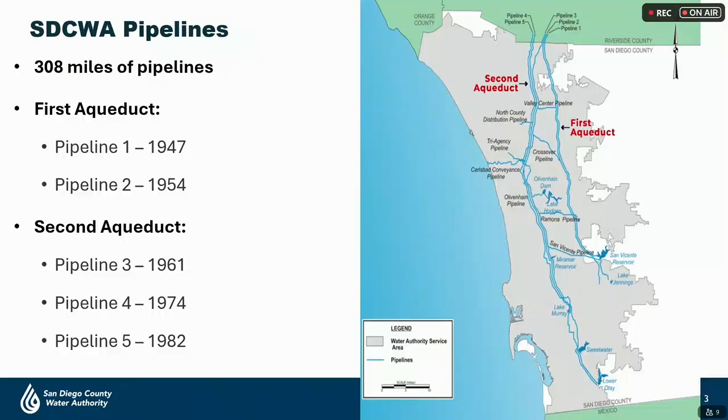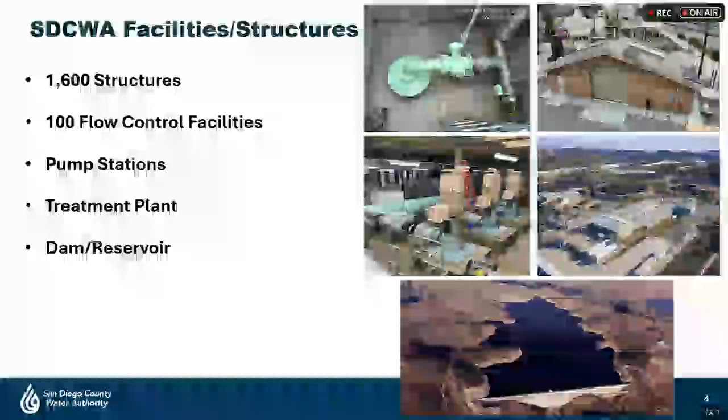In addition to our pipelines, we have several facilities and structures. We have about 1,600 structures that allow us to drain and refill our pipelines as needed. We have 100 flow control facility connections conveying water to our member agencies. And then we have several pump stations, a treatment plant, and a dam and reservoir.

Before we get into the details of the workshop, I want to take a moment to walk through the fundamental differences between a regional system the Water Authority has and a local system on the retail side delivering water to the end user. Due to its large scale and high pressures, the Water Authority's system is susceptible to higher risks if it fails. The more risk we put on our system, the higher likelihood of failure. That is why we are very cautious when asked to move to a higher risk CIP.

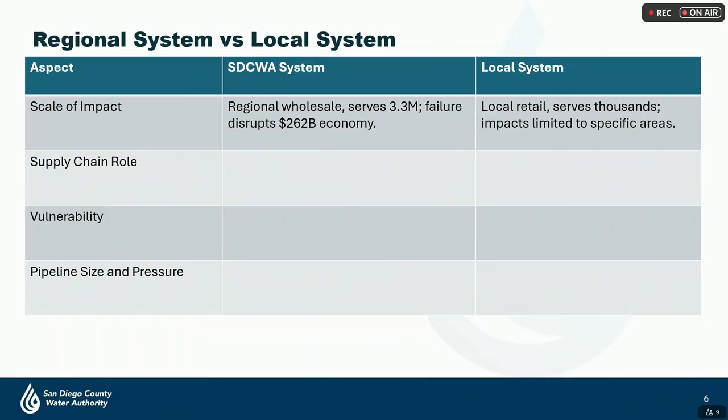Both the regional and local systems are equally important. Disruptions to either of these systems has a different level of impact. For the Water Authority's regional system, a failure potentially disrupts the entire region, affecting millions of customers. On the local side, a failure will also have impact, but be limited to potentially a specific area, impacting thousands of customers. As an upstream provider, the regional system can have a cascading effect if it fails. Each of these systems has different levels of vulnerabilities, and the impact can vary greatly. Regional threats of drought, seismic, and cyber attacks can result in a widespread impact, and because the system lacks redundancy, take a very long time to repair.

There are also local threats that you may face, such as pipe breaks or contamination, and typically on a local system, there are opportunities for redundancy, and repairs can be completed in a faster time frame. Finally, there can be bigger consequences of failure in the Water Authority's large diameter, high volume, and high pressure system as compared to a localized failure at reduced volumes and pressure.

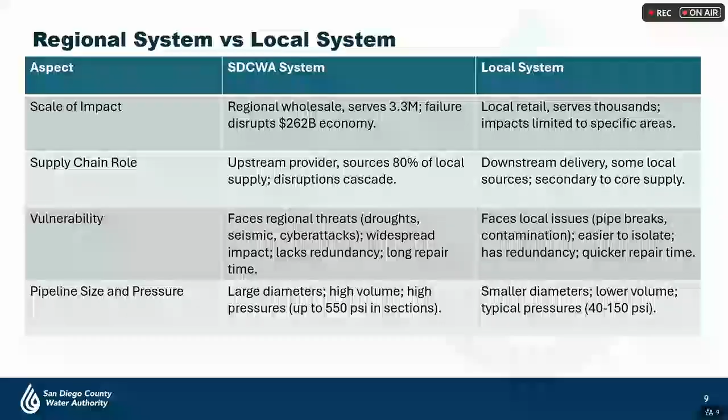So I would like you to keep these differences in mind as we go through the workshop today. Because the Water Authority's aqueduct system has a much greater impact if it fails, causing a direct impact to all of you, we need to keep the integrity of the system at the forefront of our daily activities so that we can deliver and maintain a safe and reliable water supply. So that's the sole purpose of the Capital Improvement Program, to ensure we have a system that will deliver water 24 hours a day, every day of the year.

This is the CIP forecast for the next 5 years, which is based on a moderate risk CIP that you approved in June. As we go through this workshop today, we will be presenting information on how we develop the CIP and the steps we take to identify specific projects that are included in the 2-year budgets. Now I'll turn it over to Jeff Schoaf to discuss the guiding principles used to develop the CIP.

Thank you, Nina. So let's take a moment to review the principles that guide the development of the CIP every 2 years.

It all starts with our mission statement. That's the foundation that drives us every 2 years, and that is to maintain and provide a safe and reliable water supply to the member agencies as well as to the region. This has been and will continue to be the driving force as we develop the CIP.

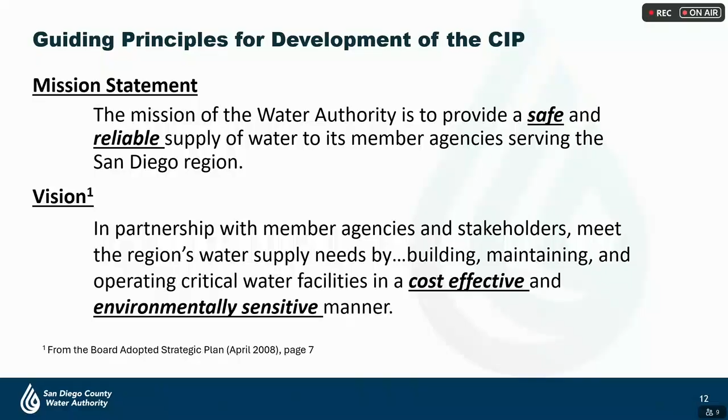When the board adopted its strategic plan, it enhanced these principles to include doing so in both a cost-effective and environmentally sensitive manner. So when you think of these 4 principles of being safe, reliable, cost-effective, and environmentally sensitive, these are the principles that guide the CIP.

Some of these we do not have any discretion over. Why? Because they're governed by laws and regulations, so there are things requiring us to do certain things at a certain time. However, in other areas we do have some discretion, and that's where we rely on a risk-based approach to developing both the scope, the schedule, as well as the budget.

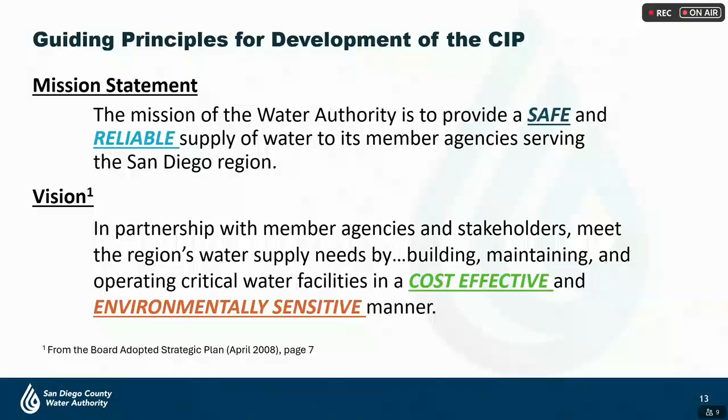And so we let the data drive the development of the CIP. As we go through this workshop this afternoon, you're going to hear that principle carried throughout, that the CIP is a risk-based system. We let the data drive what we do and when we do it. So I'm going to go through each of these principles briefly to illustrate that.

Let's start with our non-discretionary items. These are items that we must do because of regulatory requirements. Now, all of our projects have to comply with environmental regulations.

So in California, we're governed by the California Environmental Quality Act, or CEQA. If there's any use of federal funds, such as a grant, then we also have to comply at the federal level, which is the National Environmental Policy Act, or NEPA. All of our projects have to comply with those, and most have some sort of revegetation requirement.

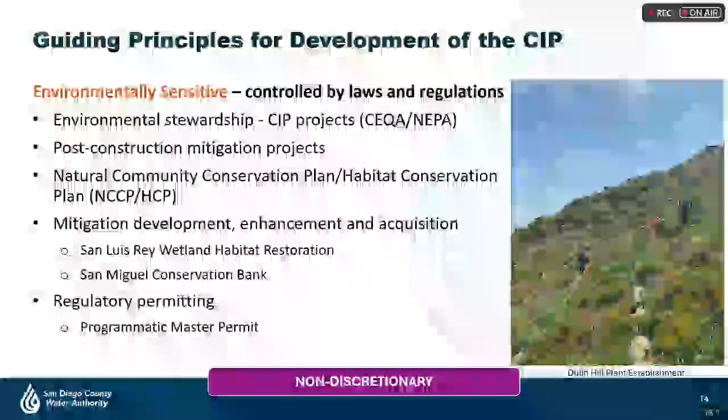That typically lasts around 5 years. We also have projects needed to comply with our Natural Community Conservation Plan, or NCCP, as well as our Habitat Conservation Plan, or HCP. A good example of that is the San Luis Rey Wetland Habitat Restoration Project that you approved last month to move forward with construction.

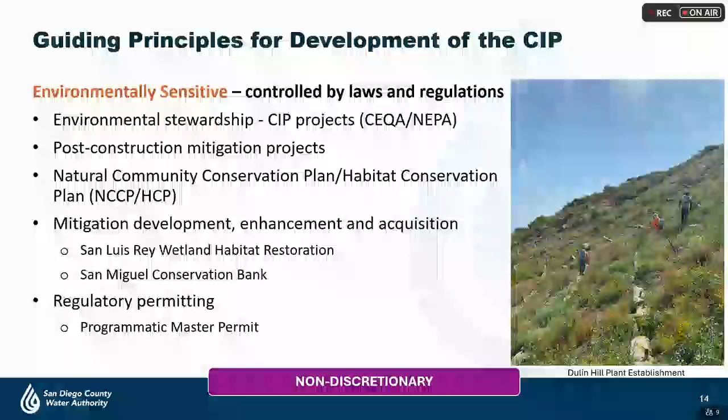On the right there, you see an example of what we did over at Dulin Hill. This was our plant establishment project there to help comply with those as well. Again, there are must-do projects that we have to do, and we don't have much leeway as to what it is and when it has to be done.

Looking at safety, again, there are certain projects that are non-discretionary. They're controlled by laws and regulations. Now, some of these can be funded through the operating budget, such as the monitoring and sampling of our water for water quality. But there are some projects that deal directly with safety that are funded through the CIP.

So, for example, on the right there you see a picture of our Red Mountain Treated Water Tunnel. We repaired several of the tunnels on the treated water system. I don't know if you can see it, but if you look really close, you can see some water squirting into that treated water tunnel. So this is untreated groundwater seeping into our treated water system. You don't want that to happen.

Now, I want to point out this did not pose an immediate threat to health and safety, but the Division of Drinking Water said, look, you've got to take care of this, and you need to take care of it right away. So that's a good example of a non-discretionary item. We had to take care of it. It's not something that we could defer.

And on the horizon, we have some future projects that are also dealing with water quality, specifically our nitrification study. We have lower demands on the system. It's causing some issues for our operators relative to nitrification, and there's potential for chlorine injection facilities as we go down the line.

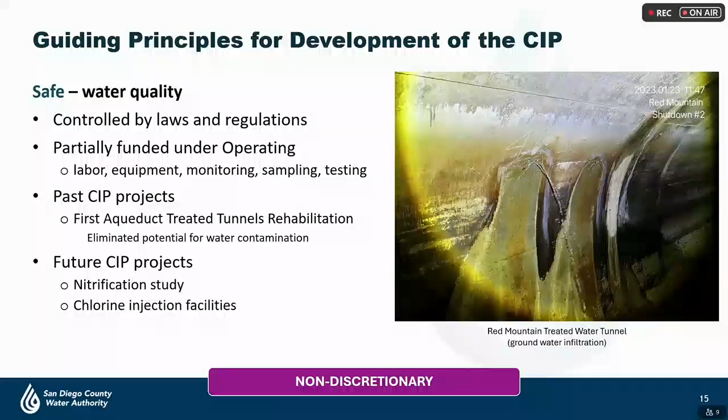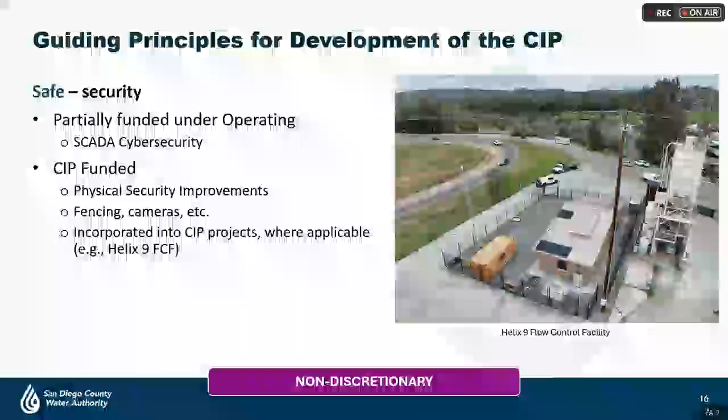Continuing on this non-discretionary thought is safety. Again, there are some items that we just don't have discretion on. Some of this can be funded through the operating budget, like our SCADA cybersecurity, but also some can be incorporated into CIP. Where it's feasible, we incorporate some of these safety features into our CIP. So the Helix 9 flow control facility project pictured there, we had some fencing to help prevent unauthorized intrusion into our property, as well as the installation of some very high-quality cameras that help our operators up in Escondido monitor the safety of that facility. So that's examples of our non-discretionary items.

Let's move to parts of the CIP where we do have a little bit of latitude. As Nina mentioned, our system is a high-pressure system. Certain portions of our system can reach pressures exceeding 500 psi. To put that in comparison, at your house you have pressures of 70, 80 psi perhaps. You may have a higher pressure out at the street, but maybe you have a pressure reducing valve at your house to lower the pressures. Our pressures can reach 5 times what you see at your house, and those pressures pose a real threat to life and property.

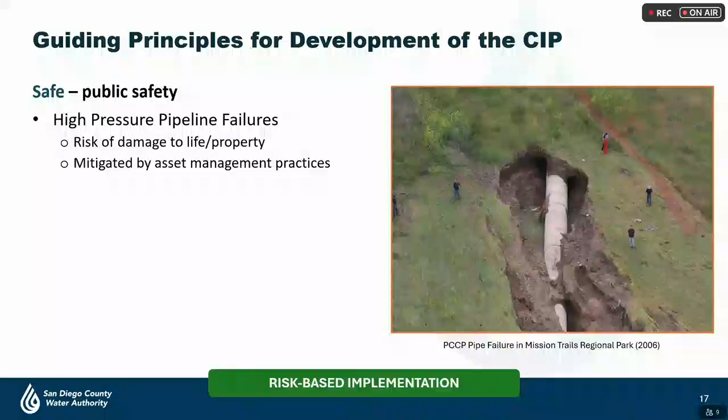Pictured on the right is an example of what can happen when a disaster occurs. You've seen this picture before. This happened in 2006. This was a failure of one of our pre-stressed concrete cylinder pipes, and that type of failure is the type of thing that keeps us up at night. We want to make sure that this does not happen. But we do have ways that help us mitigate these dangers.

Martin Coghill will get into this a little later in the workshop, but we monitor our PCC pipe with our acoustic fiber optic monitoring system. We also do regular condition assessments of our system. We'll get into the pipelines, visually inspect them, and also use some very high-tech tools that help us scan the health of the pipe. When we do that, we can give attention to specific critical areas of the aqueduct system, and we have a couple of ways that we can handle those.

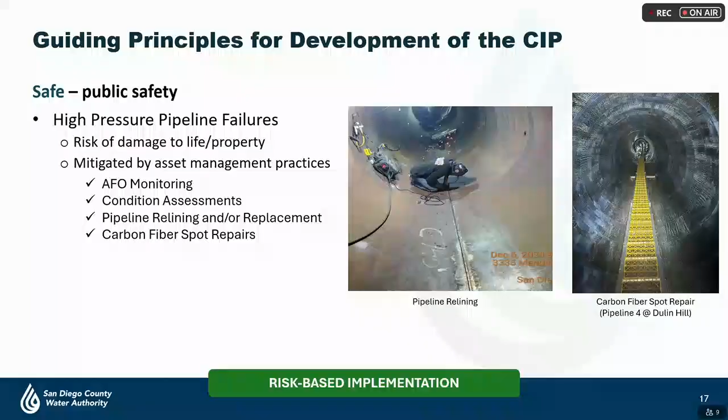On the left you see a picture of our relining. You hear a lot about asset management being relining our pipelines, but sometimes we don't have to reline the whole pipeline. If there's maybe just a portion of it, a stick or two, we can do something else, like what we did recently on Pipeline 4, pictured there on the right, and do a spot repair. So we have some latitude using a risk-based approach in determining the best method that will help stretch our CIP dollars.

The way we do that is we regularly inspect our facilities, and again we use risk-based implementation to try to prevent that from happening. Some of the things we look at include age of the facility, components to see how they're doing, whether mechanical, electrical, or structural, whether the facility meets current codes, whether it be a building code or safety code, and how often we have to go in and repair the facility.

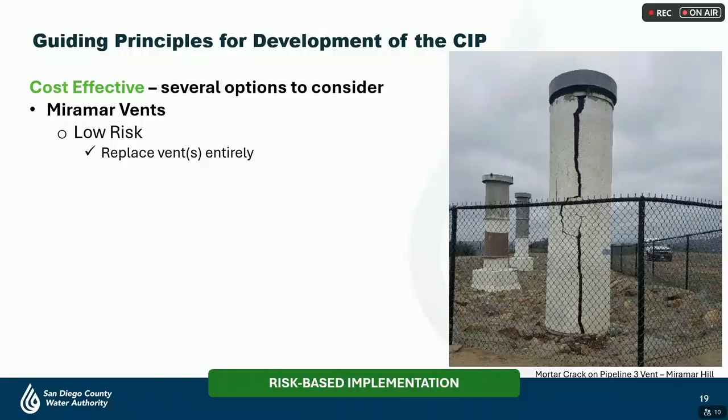I'm going to walk you through the analysis we go through to determine the best cost-effective solution for an issue like this. If this vent were to fail, just look at the one with the crack, it could cause damage to the surrounding area, but it could also render the second aqueduct inoperable.

So the low-risk option, which arguably is the most expensive, could be to just replace the whole thing. But that's not the only option. You could go to a moderate risk, and since the interior of that vent is in good shape, maybe you just address the exterior, chip away that outer coating, and reapply it. That's an option. Or you could go to an increased risk, which is do nothing. Or maybe you patch that crack. Now, patching that crack is probably something you're going to have to do a lot. So I ask you, rhetorically, what is the most cost-effective solution here?

Well, we chose to go with the do-nothing option, and the reason is because the vent is not in imminent failure. It's not ready to collapse. We monitor our aqueduct monthly, so we can keep an eye on this. If something were to happen, we could pivot and address it, but right now it doesn't seem to be something we have to take care of right now.

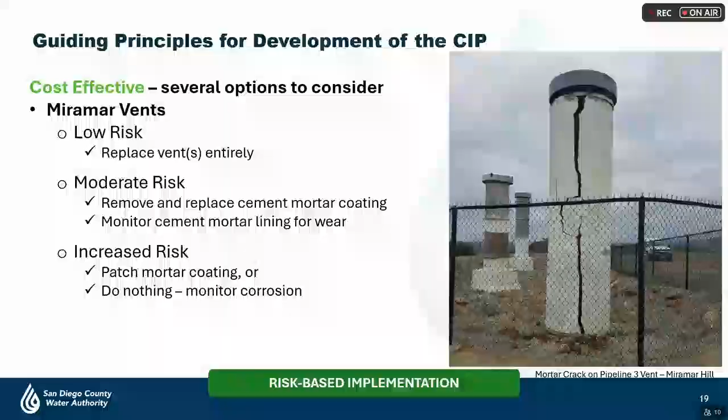In fact, you'll be considering the long-range financing plan, a draft copy of that later this month. We have deferred this project outside of the 10-year plan. So this is a very simple example, but it's what we do on every project to figure out the most cost-effective solution to an issue at hand, and it's not always the most expensive.

To sum up this portion of the workshop, the guiding principles when we look at the CIP are to be environmentally sensitive, to be safe, to be reliable, and to be cost-effective. Sometimes we have no discretion on what we can do; laws and regulations will govern what we do and when we do it. But at other times we can take a risk-based approach and let the data drive what we do and when we do it.

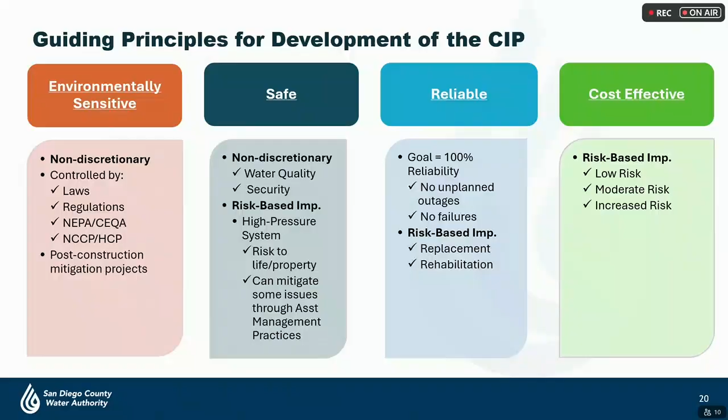So that's a lot, and we've got a lot more to cover, but I think this might be a good time to pause and see if there's any comments or input to what we've presented so far. I would tend to agree, and there are several comments. Director Aran.

So the failure of this vent, if it were to fail, could it take out the other 2 vents, which would force a shutdown of the aqueduct? So if that vent fails, is it going to be an incremental failure or a catastrophic failure? In other words, will it fail incrementally and you can see it happening, or does it just go?

Yeah, that's a great question, and we looked at that. It would more than likely be an incremental failure. We took a look at the steel, and the steel is thick. It doesn't look like it's just going to collapse all at once. So we can monitor it on a regular basis, and we would probably see that coating start to come off further. It would not just be a sudden collapse. That's a welded steel can inside? Yes.

So I had a question on slide 18 where we talk about reliability, the goal of 100% reliability. My question is, was that something the board directed staff as a 100% reliability goal? Before we answer that, I'll go full circle to my intention: this board, on an annual basis, reviews the budget and sets the rates, and we constantly put strain on the staff to do better and make cuts or look at decreasing the amount of capital.

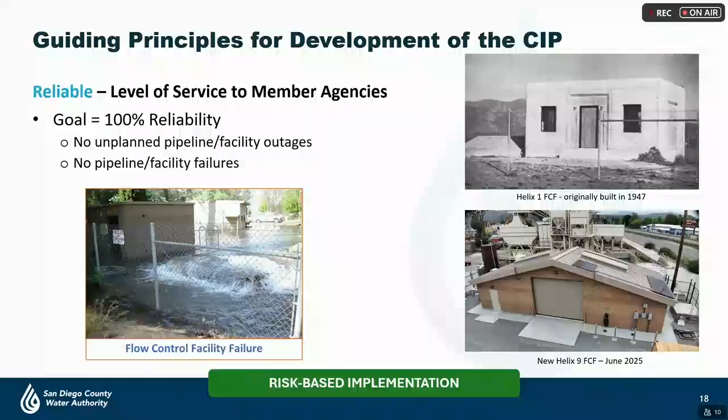If this is a board-adopted goal of 100%, the board needs to understand that we're expecting staff to hit 100% reliability, but then we're cutting them at the knees by not providing the funds to support that. If this is a board-adopted goal, the board needs to make sure we're providing the funding to support it. Or if not, the board needs to adopt what goal it wants and provide the funding that aligns with that. I know those conversations happen at other districts. We're all concerned about the rates the Water Authority is setting and the impacts to member agencies. But if we're setting that standard, we need to align our goals and the appropriate funding. So is that something we know?

The short answer is it's more of a staff-driven goal rather than the board taking a formal position on the CIP. I think it would be helpful for the board to see and make a decision on that, because it's unfair for staff to try to hit a goal they have if, say, the city of San Diego or another agency is okay with having some impacts—maybe 95% is okay and good enough—then we need to provide enough funding for that. If we demand the Water Authority provides water at all times and is 100% reliable, then we as a board are responsible to provide that funding. So I think it's important to come back and make sure we're not putting staff in an inappropriate spot, making them make hard decisions.

Thank you. Understood, Director Leahy.

I'd also remind everybody that we're in the midst of the long-range financing plan, so I think that's part and parcel of this conversation as well. This board is going to be asked as part of that process and the adoption in November to look at a lot of priorities in terms of how we budget and finance around here. So add that in as well.

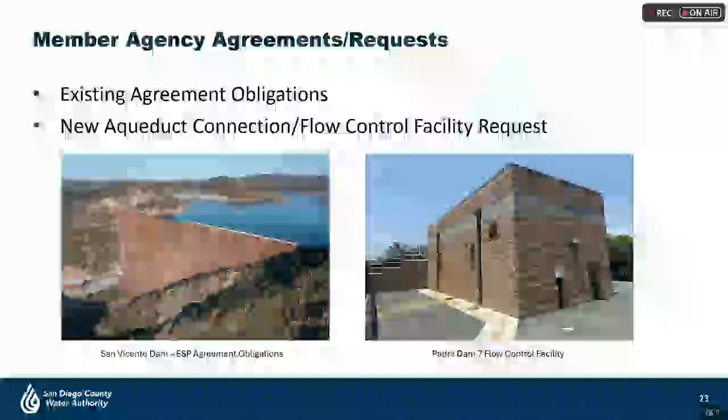Okay, so the first set of ways I'm going to talk about have to do with existing ESP or agreement obligations that we have for infrastructure improvements, or specific facility requests that we get from our member agencies. So the picture on the left is the San Vicente Dam, and this is a good example of existing agreements that we have in place that have obligations that lead to CIP development. The San Vicente Dam raise was part of a 1998 ESP agreement between the Water Authority and the City of San Diego. Through that agreement, we raised the San Vicente Dam to increase and provide ESP, emergency, and carryover storage for the region. Out of that agreement, there were also obligations for ongoing facilities and cost splits between the two agencies, which we work with the City of San Diego on an annual basis to identify, and those costs are then incorporated into each 2-year budget build that we bring to this board for the CIP.

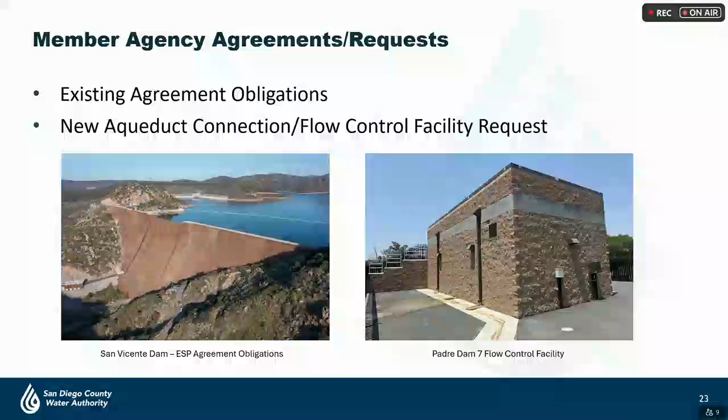Transitioning to the member agency requests that we can get for new facilities on the regional system. The picture on the right is the Padre Dam 7 flow control facility, a somewhat recent example of a request that came from Padre Dam. When those requests come in, we work with member agencies to plan and develop those projects. Now, while those projects are typically reimbursed and funded by the member agencies, those costs are incorporated and do increase our CIP multi-year budget and 2-year appropriation.

The next segment of projects really come from our foundational planning documents, and that includes the Urban Water Management Plan and the Water Facilities Master Plan. Now, these documents look at a 40,000-foot level view of what our infrastructure needs to meet supply and system operations over a 20 to 25 year planning horizon. What we've been seeing over the last few years, especially with the Water Facilities Master Plan, is a transition away from new capacity or increased capacity projects, away from new supply projects, and a focus on system resiliency and optimization.

The 2024 Master Plan is a great example of that. That was a document approved by this board earlier this year. And if you recall, it only had 6 project recommendations that rolled out of that document and evaluation that ended up in the CIP. That's because we're really focusing on projects that leverage and use our assets that we've already developed over the last several decades. So those projects from the 2024 Master Plan really supported our asset management program and how that's going to be implemented over the years, specifically looking at system modifications needed to support the future relining of Pipeline 4 and the crossover pipeline.

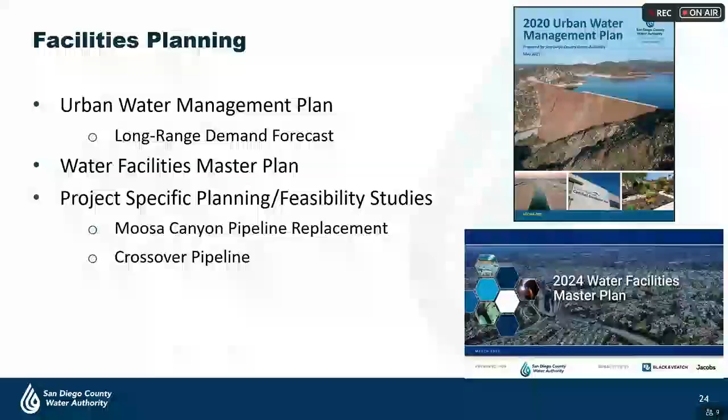The last component I'll add is that building from these master planning documents, we can do specific facility planning studies on larger projects. The purpose is to get a more granular look at these facilities, looking at different alternatives, costs, and better ways to implement those projects before we bring them to the board and include them in our CIP. With that, I'd like to bring Martin up. He's going to be focusing on where our CIP drivers are now, and that is the asset management program.

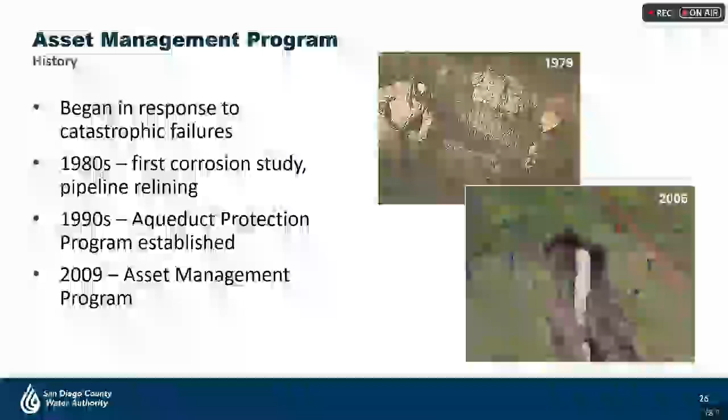On this one slide, we'll briefly talk about the history of the program. Asset management activities began in the 1980s following a catastrophic failure of a section of pipe in 1979. In that upper picture, you see a failed section of pre-stressed pipe that flooded several homes in the south of the county. In the early 1980s, the first corrosion studies began, where soil conditions were seen to correlate with the degradation of pre-stressed pipe, a phenomenon that exists throughout our county.

In the mid-1990s, the Aqueduct Protection Program was commissioned by the board, and this has evolved into what we now know as the Asset Management Program, which came into existence in 2009 to consolidate several asset management activities that were being undertaken at that time.

As Jeff mentioned, in 2006 we had that failure in Mission Trails Regional Park, and we were very fortunate it was in a park. This could equally have happened in an urban setting with obviously much higher impacts.

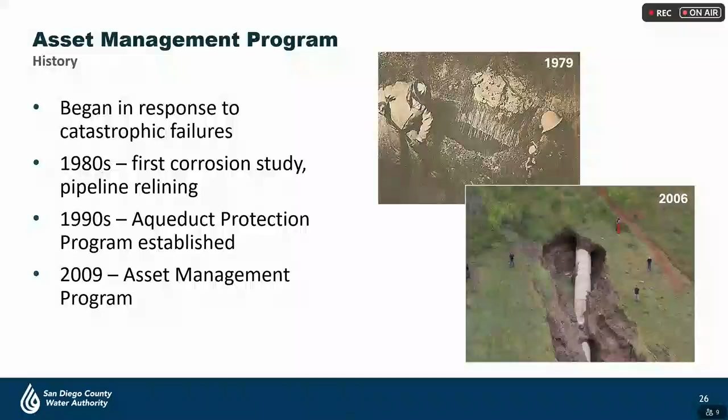The asset management team has gradually introduced the use of technologies to help assess aging assets, and we continue to look for innovative ways to assess our assets to realize the most from their lifespans. Ideally, we want to be able to confidently extend the lifespans of pipelines and other facilities through a proactive repair approach, and it's these technologies that allow us to do that.

And I've got a question for you: does anybody know which member agency in this region first used that technology? Looking around—nobody knows. It was Otay Water District. They were the first to use remote field technology. We followed them, and then a few member agencies have used that technology to this day.

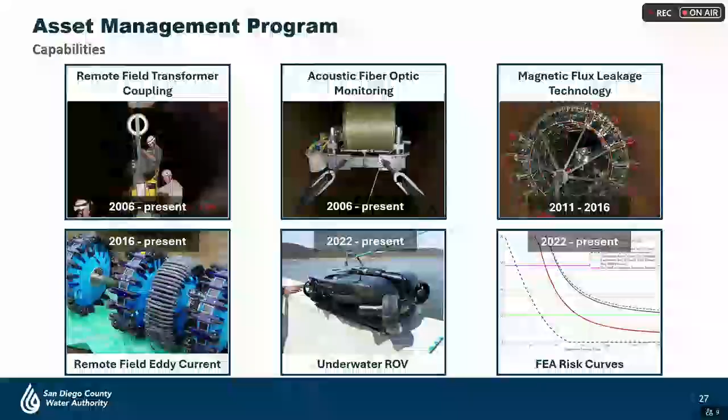In April of this year, we shared with you the specialized diving services we employed to replace those anodes. And then also in 2022, in that lower right, the board approved procuring risk curves for all remaining in-service, non-rehabilitated pre-stressed pipe, which plays a vital part in our risk assessment approach.

So the program utilizes the industry standard approach of considering total risk, which is made up of probability of failure and consequence of failure. And we're going to look at some of the parameters at play here.

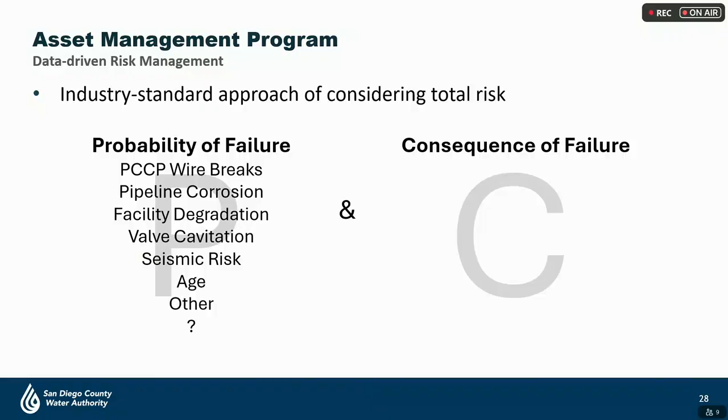So under probability of failure, we begin with pre-stressed wire breaks, which we've covered, pipeline corrosion, facility degradation, valve cavitation—that's a feature of some of our flow control facilities because of the pressure differential across control valves—seismic risk, age, and other factors that play into the probability of failure. There's a question mark at the bottom, and that's deliberate, because we learn new things all the time. As this program has matured, we're learning new things about how our assets fail within the conditions that they're doing their job.

On the other side, the consequence of failure, we have the obvious stuff: the surrounding community, nearby property, adjacent utilities, redundancy. That's a factor of, could we afford to lose a facility or a section of pipe? Is there enough redundancy in the system to maintain the level of service to member agencies? Level of service is our top priority in terms of consequence of failure. Damage recovery and other items also play a part.

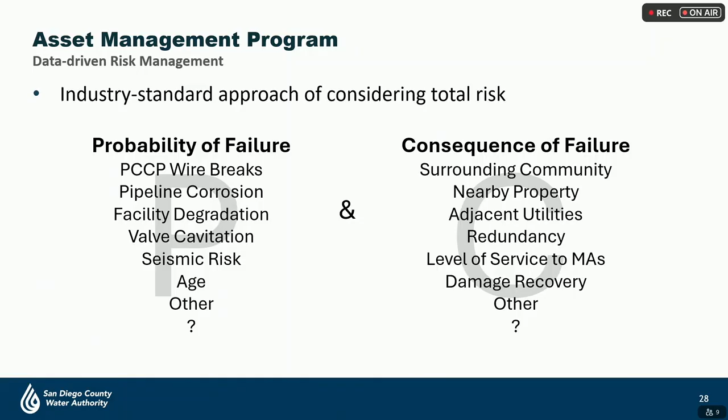The question mark is deliberate because we do learn new things as we move along. So both halves of this total risk equation, we'll refer to these as the P's and the C's as we move on. Over the years, we've used different ways to interrogate the data we've gathered, from simple risk matrices to informative visual graphics.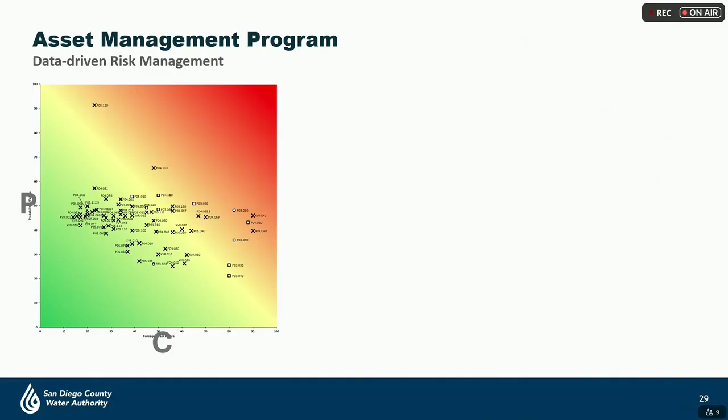We'll start with the risk matrix. This is a simple representation of assets with probability of failure along one axis and the consequence of failure along the other, the P's and the C's. In this example, the individual icons represent reaches of pipe, and this data is from about 12 years ago, so it's quite old. The simple graphic shows higher ranked projects in the upper right portion of the image, and the lower ranked projects towards the lower left. But we've learned that more illustrative ways of displaying the data can be more effective.

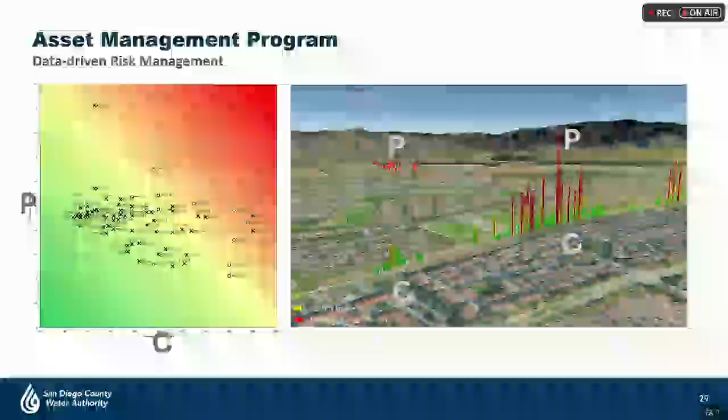The image on the right shows our geospatial representation of the P's and the C's. Take a look at that upper left P - that's right next to some red dots, which are recorded by the acoustic monitoring system. The P on the right is above a stack of colored features that represent the total number of wire breaks within those pipe sections.

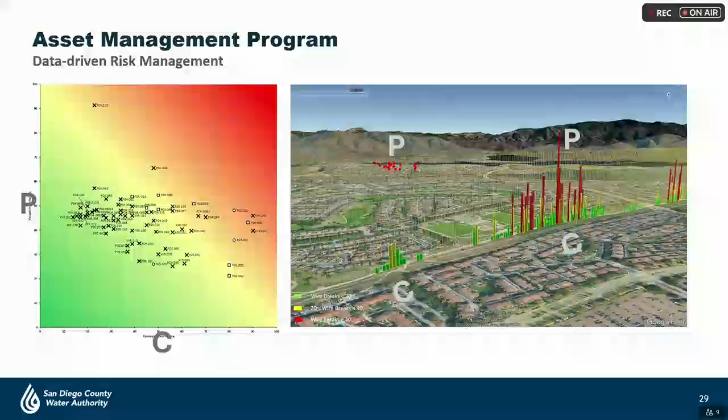The C's are kind of self-explanatory. We have a utility corridor there that we share - our pipeline has a high-pressure gas main, overhead power lines, and there's obviously residential areas. There's a high school and other features that would be impacted from the pipe failure. This section of pipe is down in the East Lake area, just north of Lower Otay. It has been rehabilitated - we secured that in 2013.

While those previous examples have played their part in our program, I'm very proud of how far we've come as a team - especially in the way we now manage our pre-stressed pipe. Our analysis uses practically every available tool in the industry. This graphic is just one of 20 similar packages of data that represent the 25 miles of pre-stressed pipe we still have in service that hasn't been rehabilitated.

The upper portion of the graphic is an aerial image representing about 1.5 miles of Pipeline 4 in North County, and is a section we've delineated as a future relining project. North is on the left, south on the right.

As we move down through the data, the green P shows the data corresponding to the total number of wire breaks in any given pipe stick, represented on a 1 to 5 scale. The yellow P represents the rate of change of wire breaks, something of high value to us that you can only actually get from an acoustic monitoring system. The consequence of failure is digitized into that blue line, represented by the letter C. Finally, a weighted total of all the data is at the bottom, summarized in red. All of these attributes play their part in determining our rehabilitation recommendations for pre-stressed pipe.

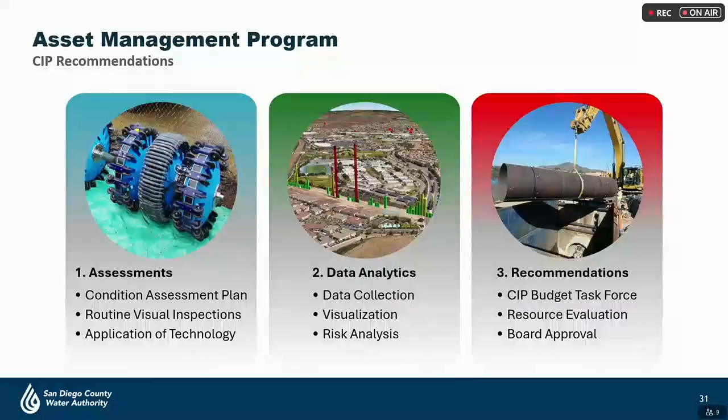By employing these asset management practices, we can, with confidence, extend the lifespan of assets should the data support that, and that is saving literally tens or hundreds of millions of dollars in premature investment. This is the essence of why we have an asset management program, and why I am particularly excited, grateful, and proud to be part of it. That concludes the asset management program section. Thank you, be happy to have any questions.

Thank you, Martin. Director Madaffer.

It's basically how quickly the wire breaks are coming. In that example, when it failed, during the budget build we had a workshop where we showed a rapid number of wire breaks on a plot—there were like 19 wire breaks within a few hours. It's that quick rate of change that we get worried about. You see one break, and when another one doesn't come for another 5 years, you don't worry about it.

Okay, thank you, that makes sense. And then you mentioned that this section is ranked 6th out of about 20 projects in the future for us to realize complete relining of all the remaining pre-stressed pipe. So how is this 6th out of— I'm sorry, is it like you've got 20 projects and this is number 6 in the list?

Yeah, in terms of ranking, yes. Have you done this analysis for all the pipelines, for this particular type? We've done some condition assessments. It's not like for like because their failure mechanisms are different, so we have different ways of projecting that information. So you have done this for all the pre-stressed pipe, yes.

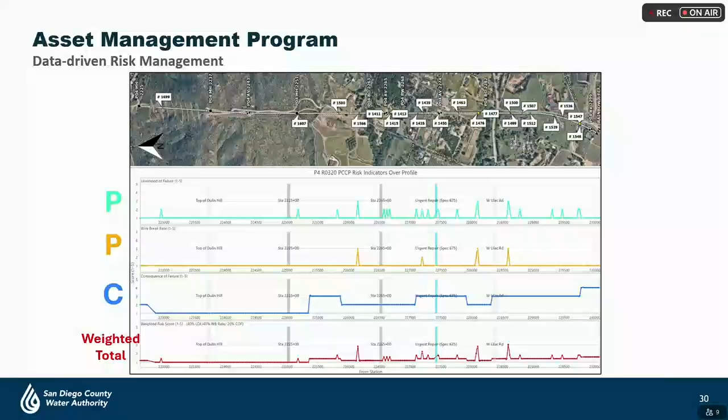I'd like to add one other thing. This is a workshop, so I'm keeping it a little light. One of the things we did, based on Martin's data, is prioritize sections of pre-stressed concrete cylinder pipe on our list. Engineering gets them and starts the design, which you'll see in Jason's next section. It takes about 2 to 3 years from start of design to construction. We may change the segment we start designing, and that was the case this year. He got new data, the frequency of change increased on a section.

He asked us to pivot. We needed to push this section out because another section, the next one we're going out to bid with, became more important. So we pivoted and started that design.

He also referenced the rate of change of wire breaks. In 2006, our fiber optic cable wasn't installed yet, we hadn't flipped the switch, so it was barely on and we were barely monitoring, and that's when the break happened. But then with the Lilac Road repair, we were monitoring and saw it starting to go. We made that decision very timely, just upstream of some houses. Had that pipe broken and we hadn't replaced it when we did, we saw the wire breaks increased significantly as we started that work.

So we're almost in a just-in-time manner, reflective of this moderate risk CIP. I saw your reaction that this pipe section was 10 to 12 years down the road, that's what we're managing. We're managing the data, and we're grateful for Martin's group because we get updated data. He's monitoring it and will let us know when we need to shift. I do have a slide toward the end showing our relining construction outlook, you'll see all the sections, and that's just on the pre-stressed concrete cylinder pipe, which is what we're addressing with the relining program. You'll see that toward the conclusion of the workshop.

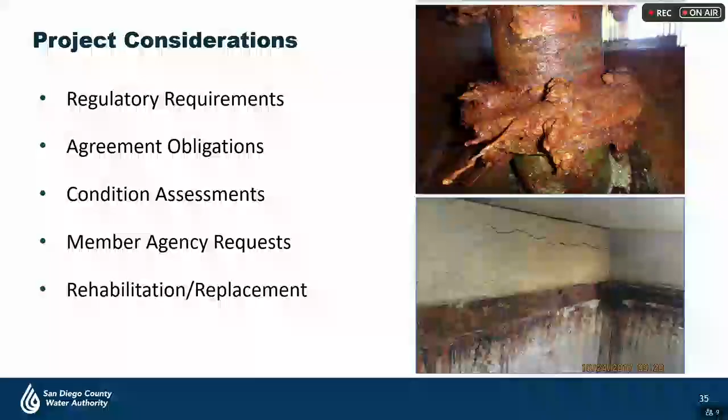When developing CIP projects, we take into account a wide range of considerations to ensure that we are meeting our standards and obligations. Regulatory requirements play a critical role, ensuring compliance with laws which guide our environmental and safety obligations. Additionally, condition assessments provide a detailed evaluation of our infrastructure's health, identifying areas of wear and potential failure across our 308 miles of pipe and 1,600 structures. Together, these considerations help us understand the urgency and scope of each project, determining whether immediate action is needed to prevent disruptions or if strategic planning can address long-term needs.

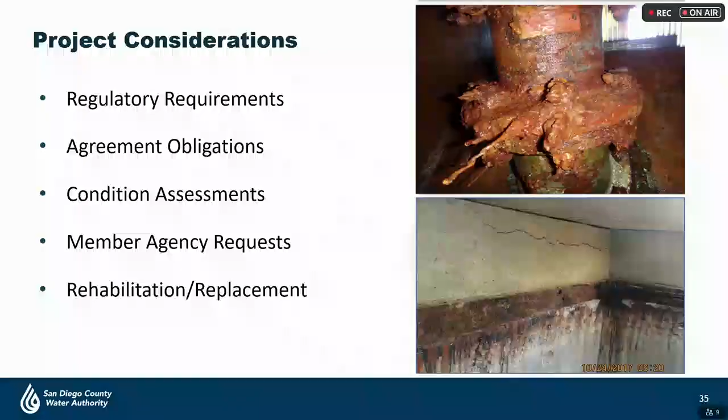What you can see on the screen here are a couple of photographs from recent condition assessment activities. On the top, you'll see heavily corroded mechanical piping. Just below that is a crack and visual corrosion in one of our first aqueduct bifurcation structures.

This upcoming graphic will illustrate our existing CIP development process, which occurs every 2 years, showing at a more granular level how a project is born and what steps are involved to ensure that the proper projects are elevated for execution.

After this initial review, the project is further defined, establishing its scope along with an estimated execution schedule and cost. Once the basic project parameters have been identified, we coordinate across numerous departments, including O&M for shutdown timing, finance for the 2-year appropriation and 5-year forecast, and water resources for master plan alignment and environmental considerations. This phase analyzes many factors such as financial impacts, scheduled shutdowns, just to name a few. Ultimately, this effort culminates into the budget document you're familiar with, creating transparency and allowing for an informed decision-making process.

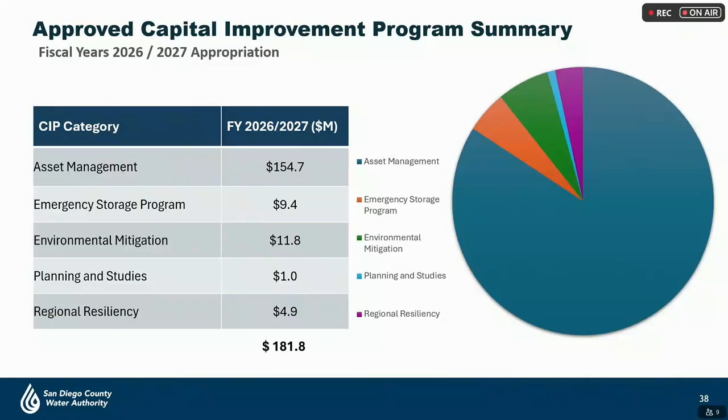Here is a summary of our approved capital improvement program for fiscal years 26 and 27, based on the work of the budget task force, combined with the selection of the moderate risk by the board. The total CIP appropriation is approximately $182 million, broken down into the categories shown on your screen. This suite of projects is focused on maintaining our existing infrastructure, representing our commitment to asset management, which accounts for the lion's share of CIP expenditures.

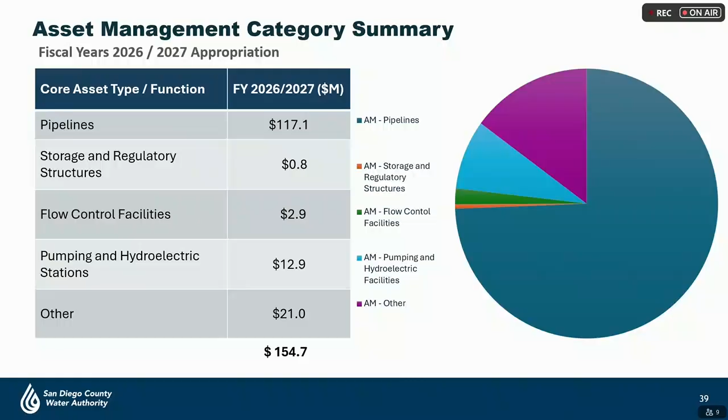Diving a little deeper into the asset management categories for FY 26-27, with a total of approximately $155 million. The majority of this investment, $117 million, is directed towards our pipeline projects, underscoring their critical role in our infrastructure. The remaining funds are allocated strategically across other core asset types and functions that are shown on the screen.

We understand and appreciate the difficult times we are in and want to take a couple of minutes to recognize some of the actions taken to reduce current CIP spending.

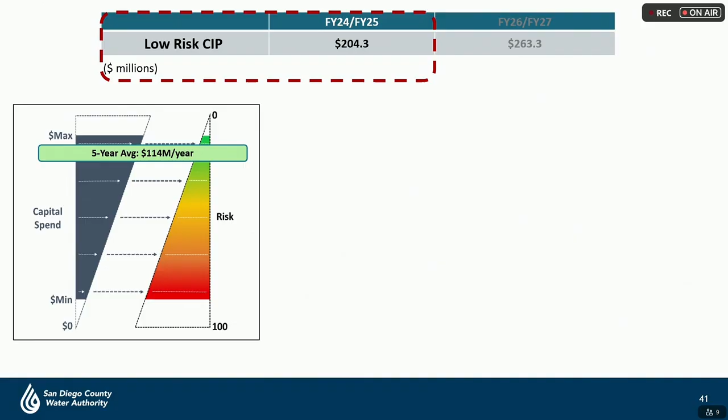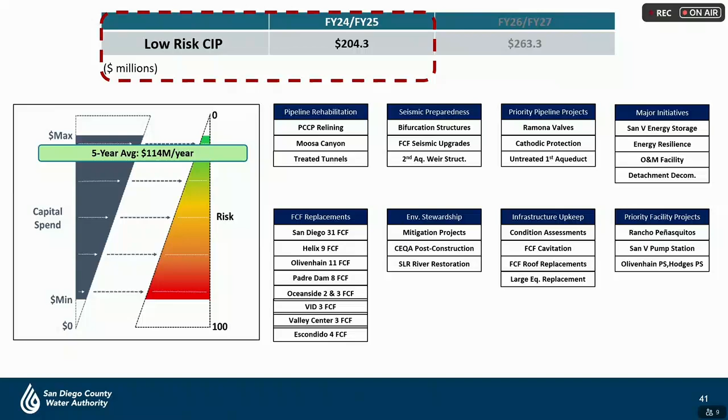First, we'll go back a couple of years to the FY24-25 budget cycle. During that budgeting process, a low-risk CIP was recommended to the board, and included expenditures of $204 million and $264 million forecasted for the FY24-25 and FY26-27 budgets, respectively. This recommended budget balanced investment across various projects and initiatives shown here on the screen. These project recommendations were generally based on condition need, or assets that had reached the end of their service life.

Before approving the 24-25 budget, the board elected to reduce the CIP appropriation by 10% to approximately $184 million, deferring approximately $20 million in projects. To accommodate the $20 million reduction, staff deferred the projects highlighted in gray on the screen, which included primarily flow control, rehabilitation, and replacement projects.

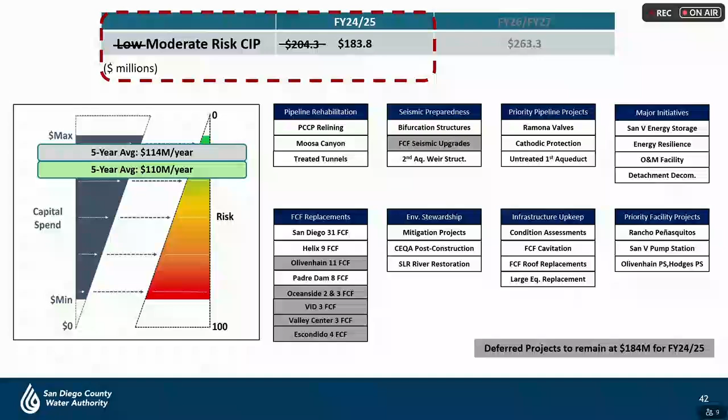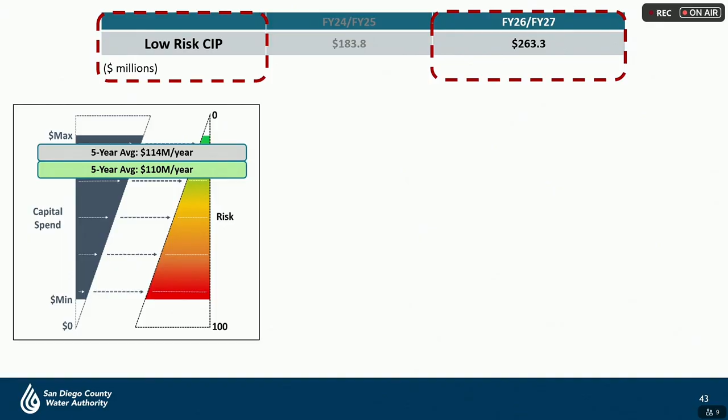The project portfolio aimed to address the most critical assets and initiatives across the agency with a focus on regional needs, de-emphasizing flow control facilities for individual member agencies.

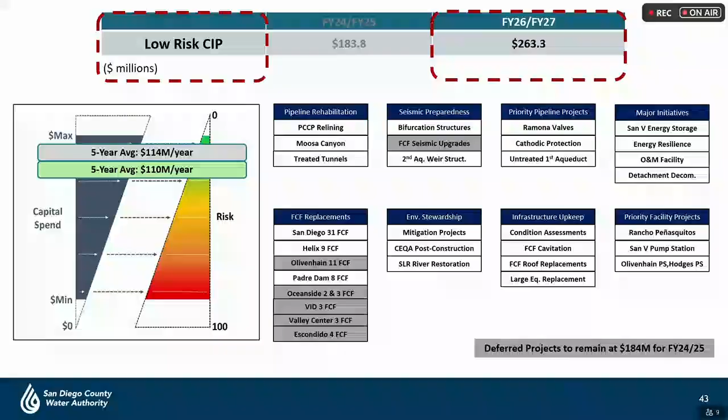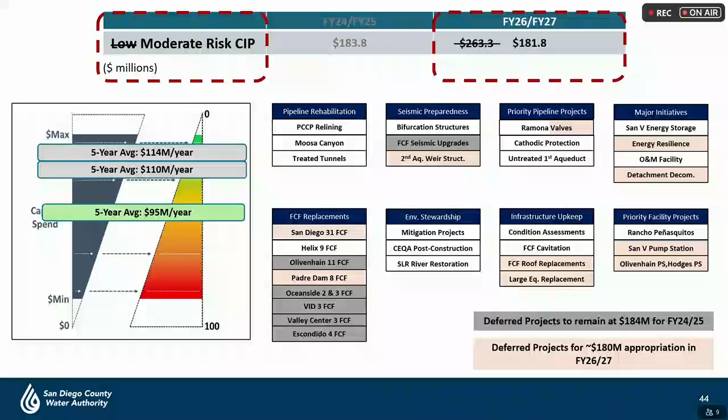These two examples hopefully illustrate how board risk tolerance decisions have reduced near-term CIP spending. However, it should be noted that these savings aren't free. Increased risk to the system has real consequences and costs, as well as an increased future CIP to address these deferred projects.

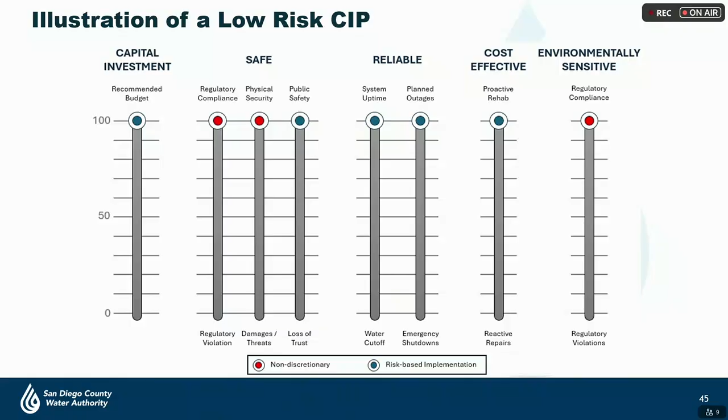To sum it up, this graphic illustrates the relationship between capital investment, shown on the far left of the screen, and the key guiding principles that we covered at the beginning. It represents the critical relationship between strategic capital investment and achieving our guiding principles, being safe, reliable, cost-effective, and environmentally sensitive. Ultimately, the closer we align our capital allocations to this recommended level, or the low-risk CIP, the stronger our adherence to the guiding principles, ensuring reliable, cost-effective water delivery to the San Diego region with minimal interruptions.

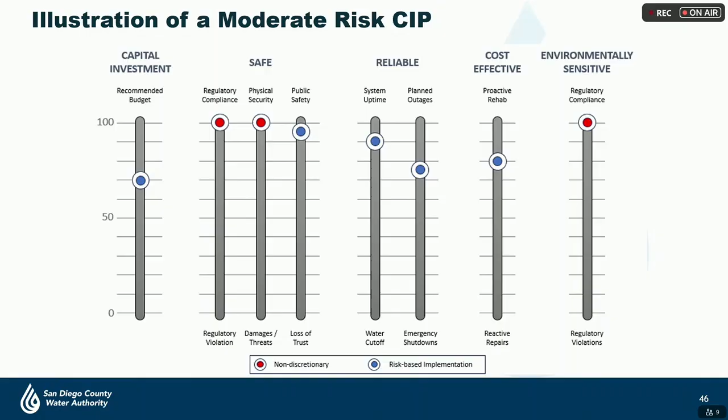With such complexity and a high consequence of failure, the board can rely on the expertise and professional judgment of its staff. Our expertise, honed through extensive system knowledge, cross-departmental coordination, and data-driven prioritization, will guide us in crafting the most advantageous CIP for the region and for the ratepayers.

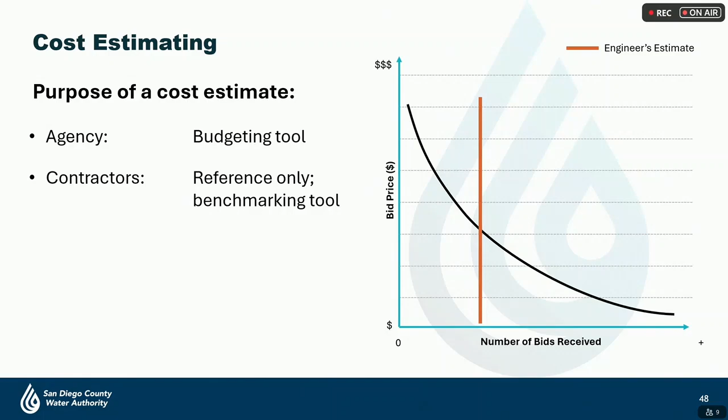There has been a lot of discussion around cost estimating, and it seemed like a great opportunity to discuss it further. When we talk about an engineer's estimate for a project, it's important to remember its purpose, which essentially serves two purposes. The first is it helps us, the Water Authority, with budgeting - asking how much capital we need to build a particular project. The second purpose is to help a prospective bidder understand the size of the project to determine whether or not it's right for their company. Ideally, an engineer's estimate would fall in the middle of all the bids received for a particular project. However, there are several factors that can influence where an engineer's estimate ultimately lands relative to those bids, and we're going to use the next few slides to discuss what those factors are.

Many factors influence the cost of everyday goods, and construction projects are no different. In the last few years, we've seen dramatic swings in the cost of fuel, lumber, steel, and other commodities essential to construction projects. The drivers impacting costs can be thought of in two categories: macro impacts and micro impacts. Macro impacts, like tariffs and global material supply and demand, are almost entirely out of our control and affect markets differently. These impacts become exponentially harder to predict with quickly evolving state and federal policies. Micro factors, like labor availability and local energy cost, can to some extent be more easily monitored simply due to their proximity.

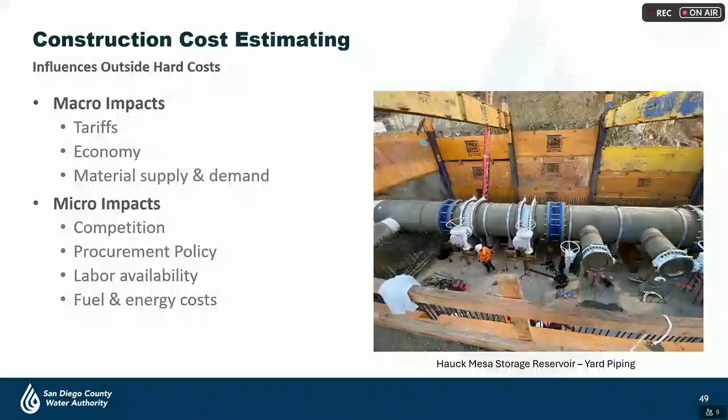In fact, these impacts can even be influenced by organizations setting local policy. All of these factors influence the costs of projects and our estimates. Contractors generally respond to cost uncertainty and risk with additional dollars in their bid to cover the what-if factor. In essence, the more variables there are in a pricing equation, the harder it is to predict the outcome.

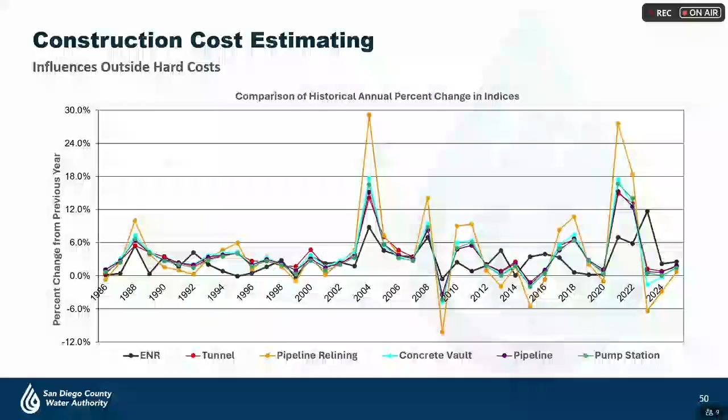This put significant pressure on the global steel market. You'll also notice the dip in pricing in 2009 from the Great Recession and another spike in 2021 from COVID impacts to supply chains. This is to say that fluctuation in market pricing, even large and abrupt ones, is normal and should be met with a measured and tempered response.

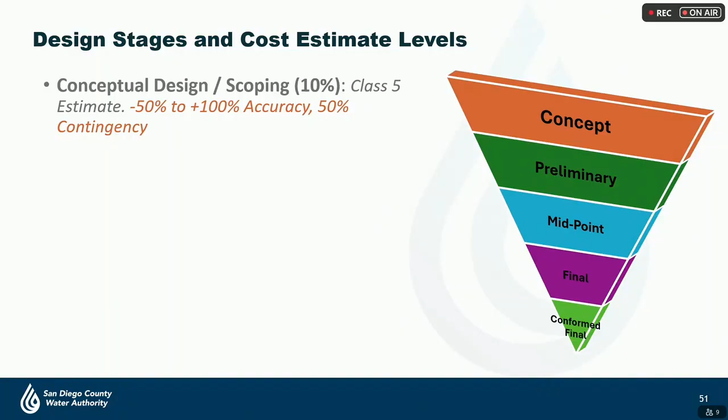The first stage is concept design, where a Class 5 estimate is developed. Class 5 estimates have the widest accuracy range, as noted on the screen, and use broad parametric tools like cost per foot or cost per million gallons to establish budgets.

Preliminary design is the next phase, in which a Class 4 estimate is created. At this stage, costs for large pieces of work are further defined, and historical costs are applied with inflation factors.

As we continue into midpoint design, a Class 3 estimate is developed. At this design stage, enough detail for quantity takeoff is performed for major work and items used. This is the same methodology that contractors use for pricing.

Final design stage includes a Class 2 estimate. Here our estimates include detailed unit costs for labor, materials, and equipment.

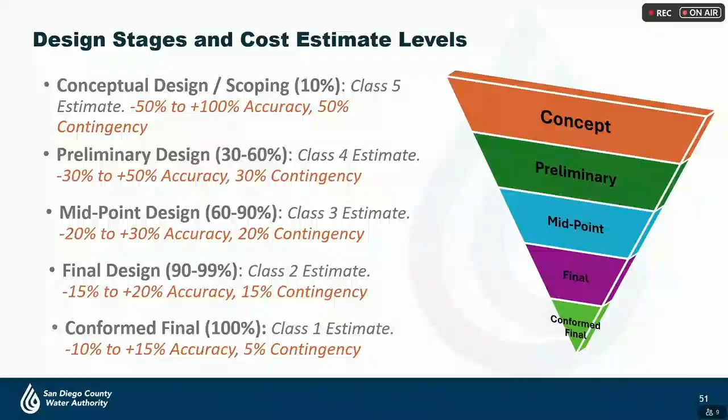Lastly, at conformed final design, a Class 1 estimate is procured. In addition to detailed unit costs for material and equipment, quotes are obtained from suppliers to produce the most accurate estimate possible.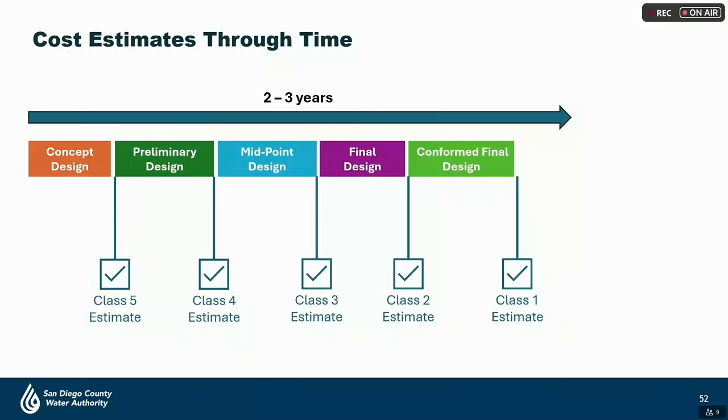Here we'll see those same design stages and cost estimates as a project evolves over its 2 to 3 year planning and design life. After we complete the Class 1 estimate, we typically get bids 2 to 3 months later before you see it here in the boardroom, and a lot can change in 2 to 3 months, as we've seen, thinking back to those macro and micro impacts that we talked about earlier.

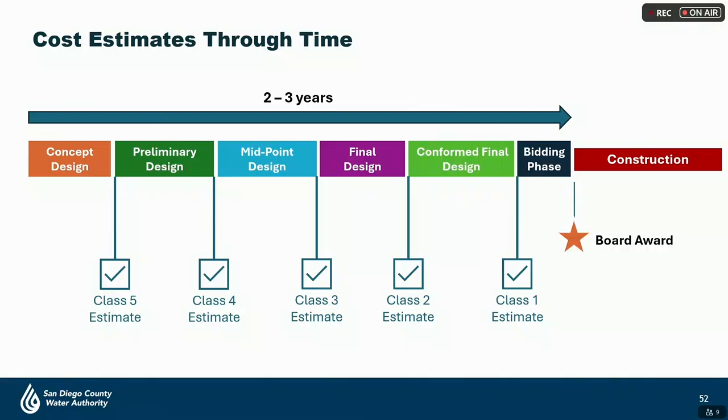All of that said, one of the biggest influences on the ultimate bid price is bid competition. Our as-needed cost estimating professional created the table shown on the screen, derived from thousands of bid results. As you can see, the higher the number of bidders, the lower the expected bid cost. The opposite is also true: when you receive less than 4 bids, elevated pricing is expected.

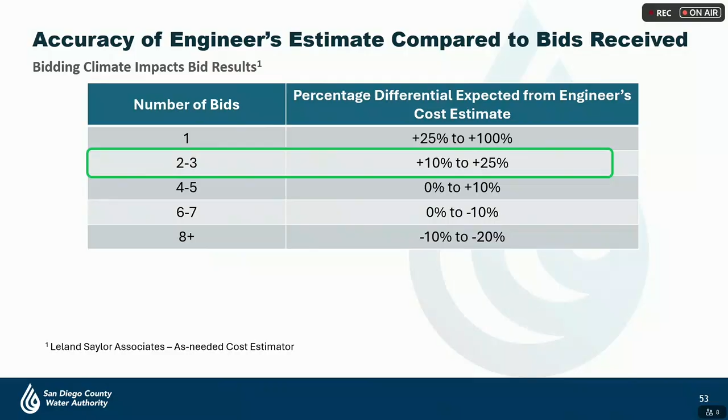For example, in our last few construction advertisements, we've received 2 to 3 bids. According to this chart, it would not be surprising to see the low bid anywhere from 10 to 25% above the engineer's estimate. This is also substantiated by many professional journals and a recent report completed by the City of San Diego's independent budget analysts on their bidding environment.

Shown on the screen is an excerpt from that analysis, and it reads, quote: 'Data show a decline in bidder participation over time, with the average number of bids per construction contract falling from 4.5 in FY 2017 to 3.1 in FY 25. This reduction in competition is correlated with higher award costs and a growing share of contracts exceeding the engineer's estimate.'

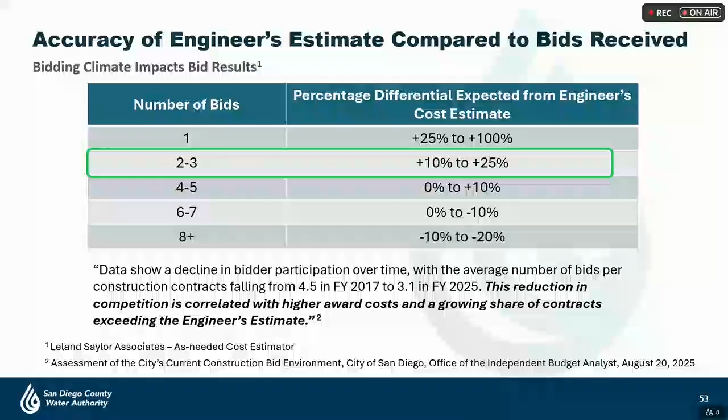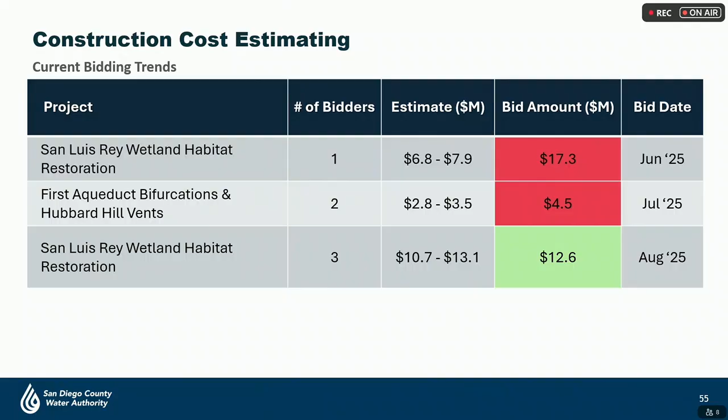Here we see our most recent bid advertisements and the low number of bidders, alongside the higher than expected bid amounts. While every project is unique and has a story to tell, as well as a multitude of micro and macro factors that can influence price, one economic truth you can always count on is that more competition equals better pricing.

All of that said, there are some things that we can do to try and mitigate the volatility in the bids that we're receiving: keeping up to date with what commodity prices are doing as the engineer's estimate is being developed, and continuing our dialogue with steel pipe and valve manufacturers on their price factors.

Leveraging our cost estimating professionals to prepare the Class 1 and 2 estimates, rather than our design consultants, is something we've implemented as well. Lastly, and most importantly, we really need to do everything we can to attract more bidders.

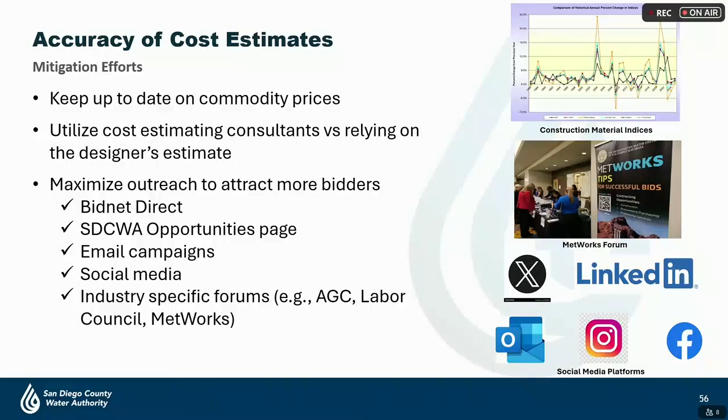It's a very challenging bidding climate right now, and contractors are being selective in what they bid on. The more we can get the word out and make bidding here at the Water Authority more attractive, the more competition and better bid results we expect to create.

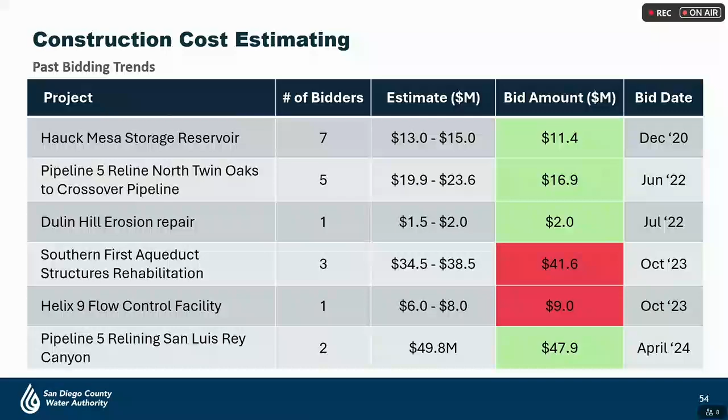Thank you again. On slides 54 and 55 — sorry, I'm new here — how many of those were PLAs? The first PLA project that was bid was the Helix 9 flow control facility, and that one had one bidder. Everything since then has been a PLA. So consistently we've gotten a reduced amount of bidders with PLAs.

Director Paul: Yes, thank you. I wanted to comment that Escondido just had a bid go out, and we're going to award it next week. We had 11 bidders. So in addition to talking to people who took out the plans but didn't submit anything, look at people who are not interested at all. None of these had 11 bidders. So thank you.

Director Norman: Thank you, Chair. I have a question about some of the requirements we put into our projects, like the CEQA and various mitigation things you mentioned earlier. I'm assuming the marketplace, the labor force companies, already know what those are. They, I hope, would be aware that anything they bid on with us is probably the same bidding that they'd do for others — they still have to meet CEQA on another project. So would I be correct in assuming those would not necessarily be impediments to a project?

It is more the labor pool aspects, because costs of supplies are going to be the same for the other guys. So if it's timing on how many bids their company can support, we're pretty well equal — except maybe, and I don't know, the PLA. Is that the only factor that's a little bit squishy compared to other bids that a company striving in the region would submit?

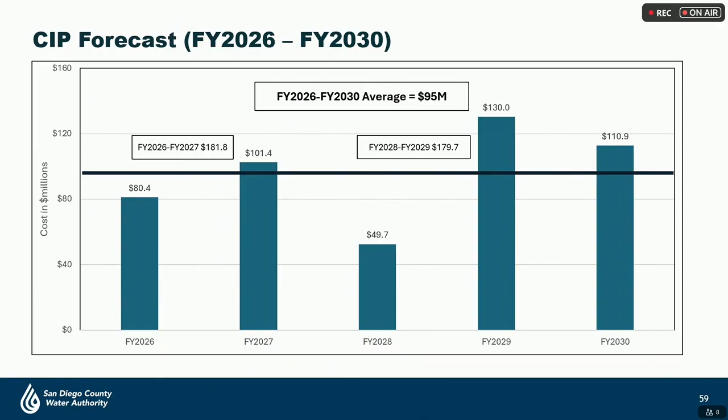One thing we're working on with finance is the long-range financing plan, a 10-year forecast. I want to give you a preview on relining, since this speaks to Director Freehoff's question about our outlook on relining. This is what our 10-year forecast looks like for the relining project, keeping in mind this is just for pre-stressed concrete cylinder pipe, which is what we reline.

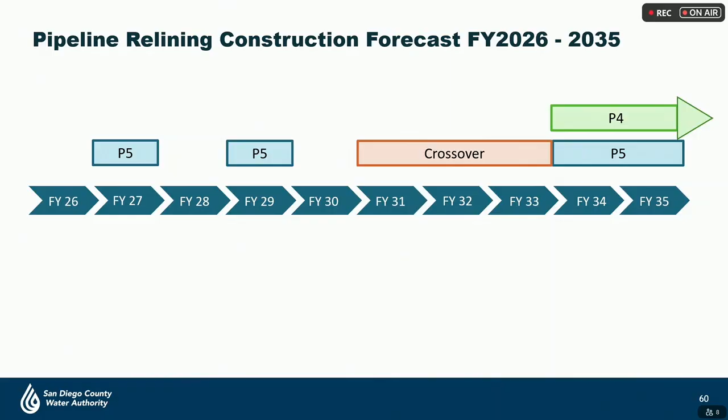Over the next 10 years, we plan to complete all of Pipeline 5 relining as well as the crossover pipeline. Pipeline 4 will bleed into beyond our 10-year plan. One thing we'll look at during that time is reducing our shutdown costs, as well as other ways to cut costs, potentially combining our relining in Pipeline 4 into a shorter duration versus a longer one. Right now we're looking at a much longer duration for Pipeline 4, and it comes down to cost. That's something you'll see reflected in the 10-year financing plan later this month.

Currently, our CIP projects have sufficient funding through 2030, that's for the next 5 years. Beyond 2030, we will be looking for additional budget, which is part of the long-range financing plan. Additional budget will be needed to reline the crossover, Pipeline 4, and the remaining section of Pipeline 5, which are scheduled beyond 2030. We'll also be looking for additional funding to rehabilitate structures such as on Pipeline 3 and the La Mesa Sweetwater extension. Since the funding for these projects is beyond 2030, in the next couple of years we'll be coming to the board for additional funding for consideration.

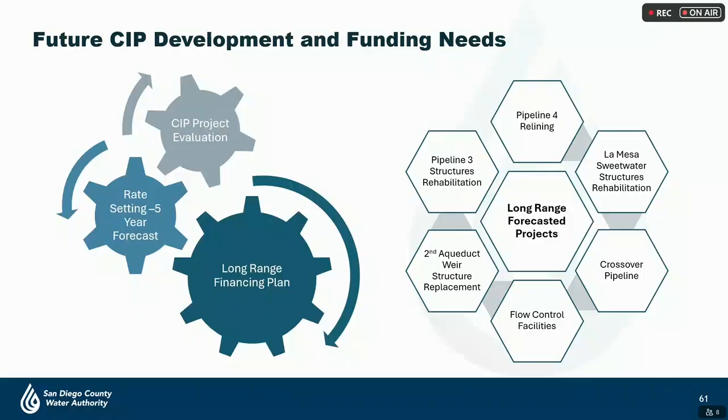Keep in mind that this is still within asset management. You will have to continually fund an asset management program. It doesn't end, because a facility built 25 or 30 years ago will potentially need to be rehabilitated. Fortunately, on our pipelines we're doing a really good job of relining that extends the life of the pipeline to 75 to 100 years. Theoretically, in the next 10 to 15 years, we're going to complete all of our relining projects, and that is the bulk of what we're spending our CIP on.

So with that, we are going to continue our adaptive approach, adjusting based on risk. That data-driven approach is really important, and we're relying heavily on Martin's group to provide that data, so we're addressing the facilities and assets we need to address in a just-in-time manner. Our 2-year CIP has clearly defined projects, and we provided that project list to you back in April for this current 2-year CIP we're working on. However, keep in mind that beyond that 2-year outlook, and especially beyond the 5-year outlook, those projects may change. They're really subject to changes based on risk, and that's the benefit of doing our budget every 2 years.

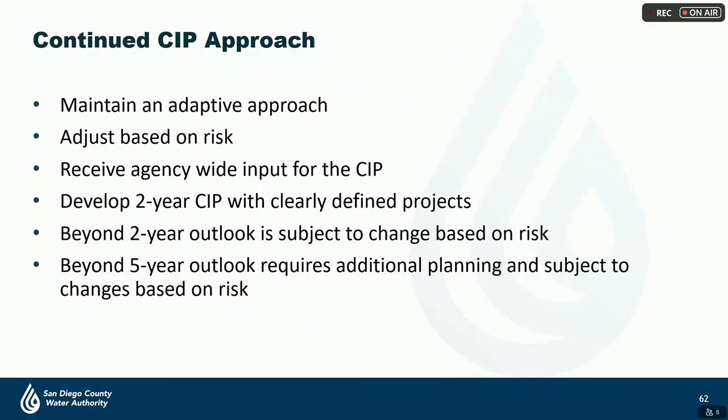That really wraps up our workshop. I just want to take a moment, before we go to final questions and comments, to acknowledge the entire team behind preparing this workshop, not only the presenters today but the whole team behind us. They did a tremendous job not only preparing this workshop but also pivoting based on the comments we heard from all of you over the last 2 board meetings. It took a lot of effort by the staff, and yet they still maintained their daily work activities and kept the schedules on our projects. So I just want to acknowledge and thank all the staff involved in putting this together.

And with that, I'll turn it back to you, Chair Serrano, for any closing remarks or discussion.

Thank you, thank you very much. And Nina, to you and your team and everybody who's been part of this, I want to express our thanks and appreciation on behalf of the board. We know that getting all this stuff together and presented to us is often a heavy lift, and I hope you all know that it does not go unnoticed, and we're tremendously grateful for the time you put into this. So thank you. I have a few other speakers.